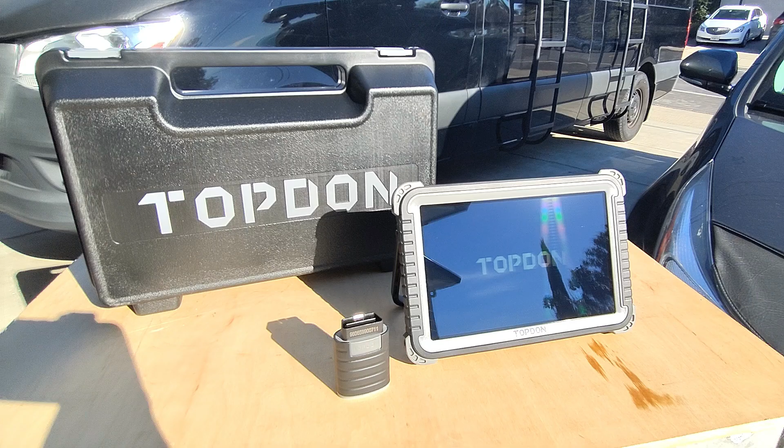Hello world, this is Random Fix, and right here I have the Topdon Phoenix Plus, and this is the most expensive scan tool I've actually purchased myself with my own money. And in this video today we're going to review it and check out some of the functions of the tool. I'm going to hook it up to a couple of different vehicles, try some stuff that I haven't been able to do on other scan tools, and see how it works out.

And then I'm going to show you guys what's in the box. And lastly, we're going to give this a Random Fix tool grade so you can make a better decision for yourself.

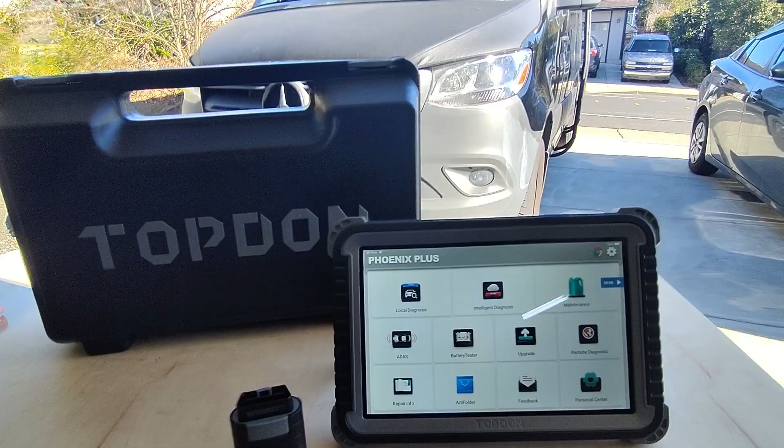So here's the unit, guys. It's powered up and I have it connected to Wi-Fi, and I've been using it for about 3 weeks. I wanted to do the video earlier, but I lost my voice, and with COVID times I really got to take it easy. So now we're doing this video today.

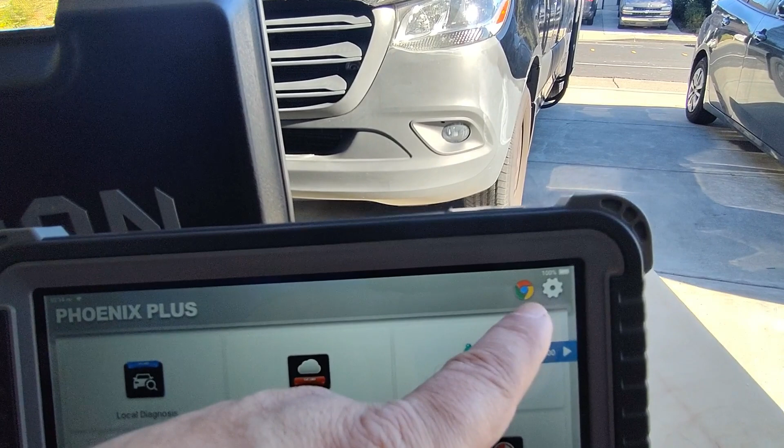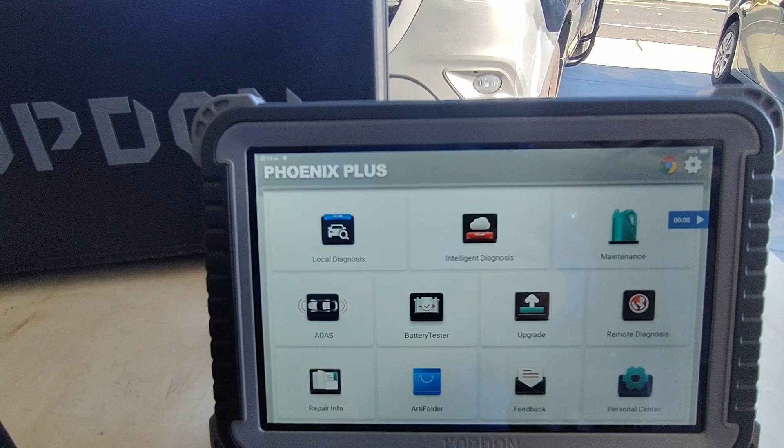I got a fully charged battery here at 100%. The battery in this unit is a 6,000 milliamp battery, and it lasts about 2 days of use. When you put it on standby for about a week, it only takes about 20%, which is pretty cool. It's got the Chrome browser built in when you do the update. And speaking of updates, this unit comes with 2 years of included updates. To activate, it comes with a special card and a password, and you have to set up an account. Once you do, you can get any update or firmware updates with just a click, just like I did.

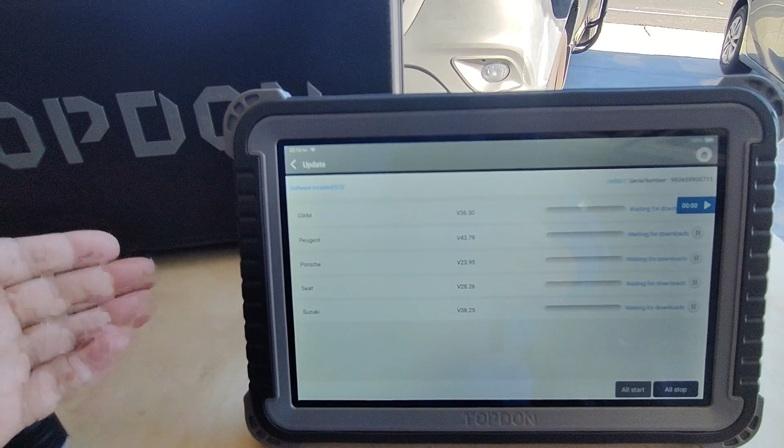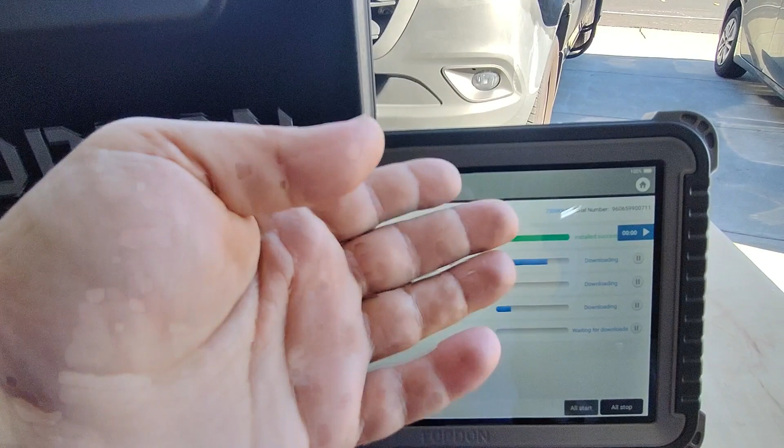And the unit is fast. Depending on whether you're using this for your house or a shop, I'll go into the pros and cons a little bit later on. As you guys can see, this is real time, and it just finished GWM. I think that stands for Great Wall Motors. We did Peugeot, Porsche's next, and it's going to finish all the updates. Anytime you want to go back, you just swipe like that and it'll go back. It's a very easy to use interface.

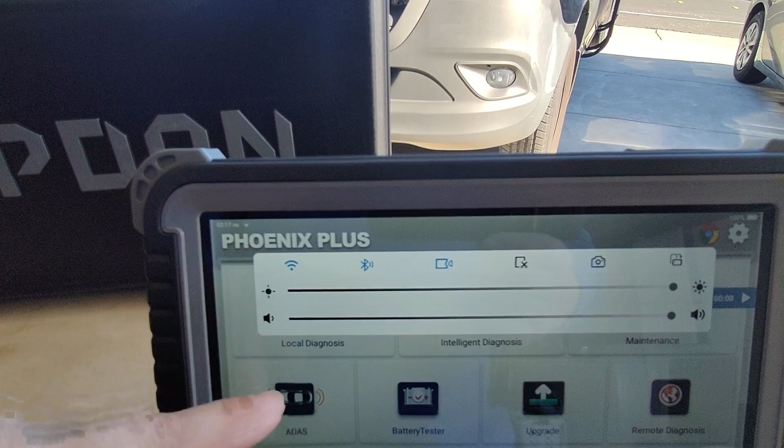It's basically a 10-inch tablet with great resolution. I think it's 1280 by 800, and it's running on Android 10, 4 gigs of RAM, 64 gigs of ROM. The interface, when you swipe down, will allow you to turn on the Wi-Fi and Bluetooth. And speaking of Bluetooth, this has a VCI, or Vehicle Communications Interface, and it's Bluetooth.

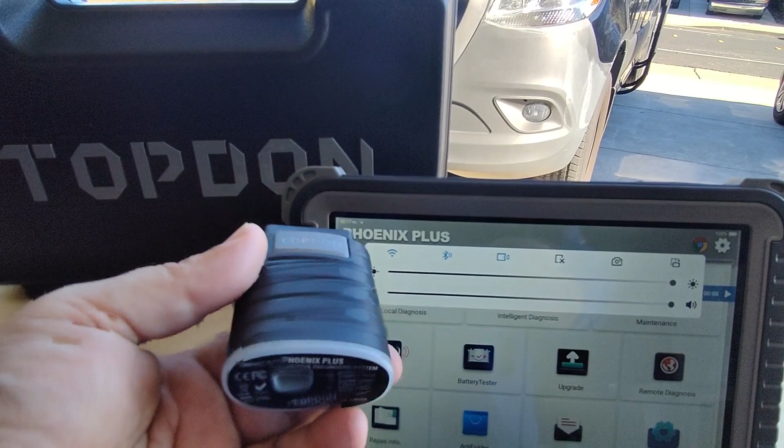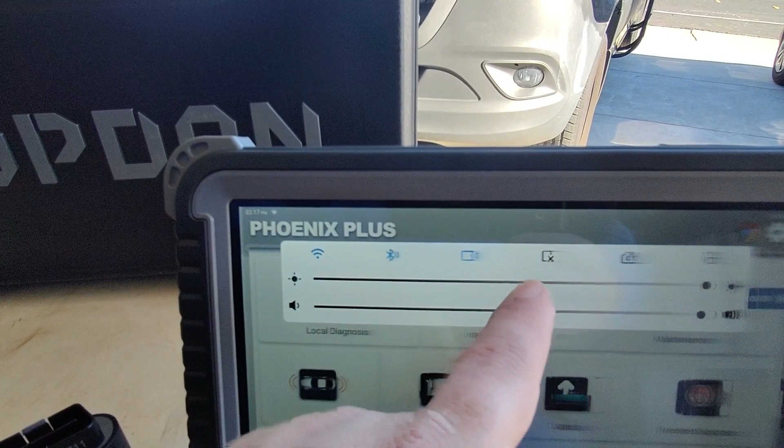So if you want to work in the shade instead of having to sit in the sun, you can do it. The unit does have TeamViewer as well, so if you want to work behind a computer with this connected in the vehicle, you can definitely do it that way. Bluetooth is right there. We can record, take a snippet, and take a picture. And talking about pictures, this unit has an 8 megapixel camera right here, and we'll display some pictures and some uses for that.

On the back of the unit, we can see that it's got this nice kickstand, and we're going to talk a little more about this kickstand because I wish it had a little notch like some of the Autel units, so I wouldn't have to worry about it falling off the steering wheel.

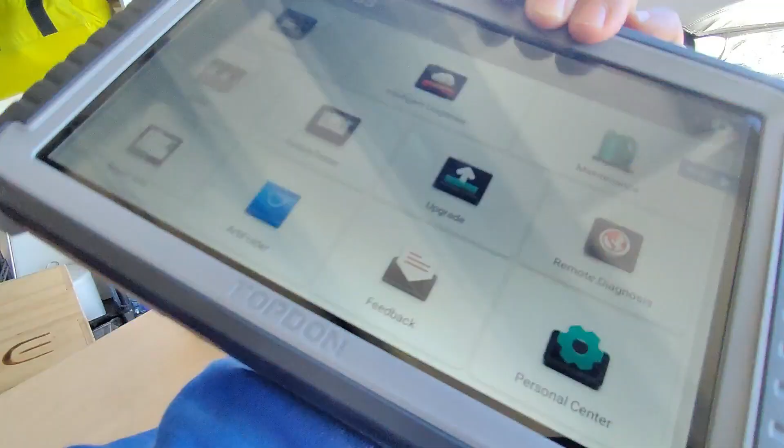We have a little expansion port back here, so you can buy different kinds of scopes and connect those once they're available. When I got the unit back in December, there weren't any scopes or modules available, so maybe they'll come in the future months. And again, this has a really nice feel, sturdy and pretty rugged.

And it also comes with a 1-year warranty. So if you guys are using this for a shop, some of the Pro units and some of the Phoenix Elite items actually come with a 2-year warranty. And if that's something that you're going to be using it for, make sure you guys check out my upcoming Phoenix Elite video as well before you make a decision here.

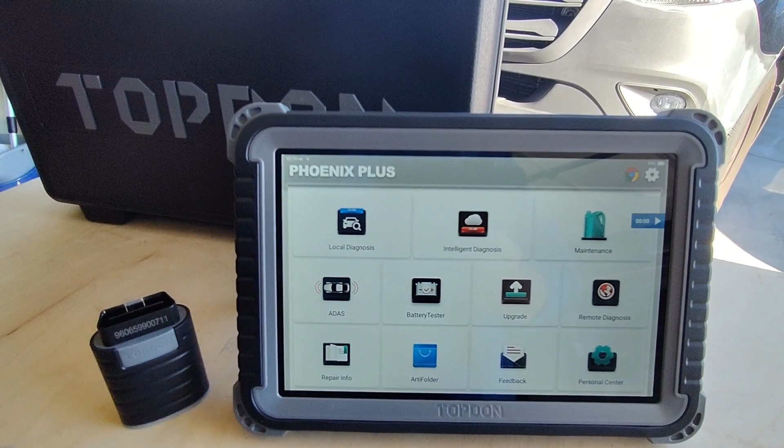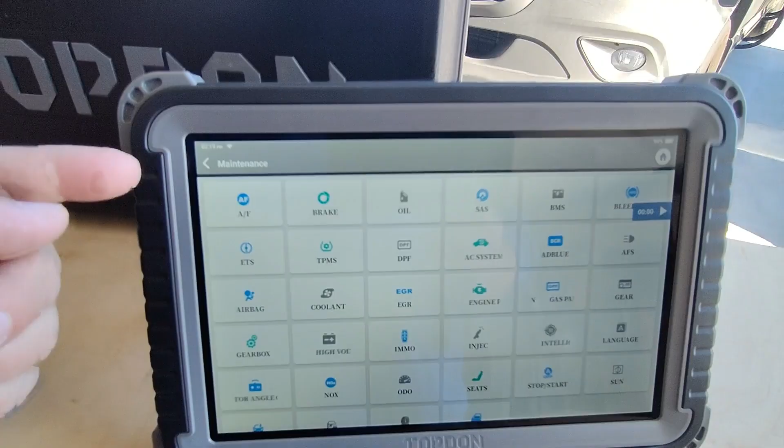So let's look at this interface here. So we got local diagnostics, we got intelligent diagnostics, and this is pretty cool because it gives you kind of a map of all the different systems, and you can visually see it, and we're going to take a look at that. We got maintenance, and under maintenance it's got 34 different maintenance resets. So if you wanted to go ahead and calibrate a window, you could.

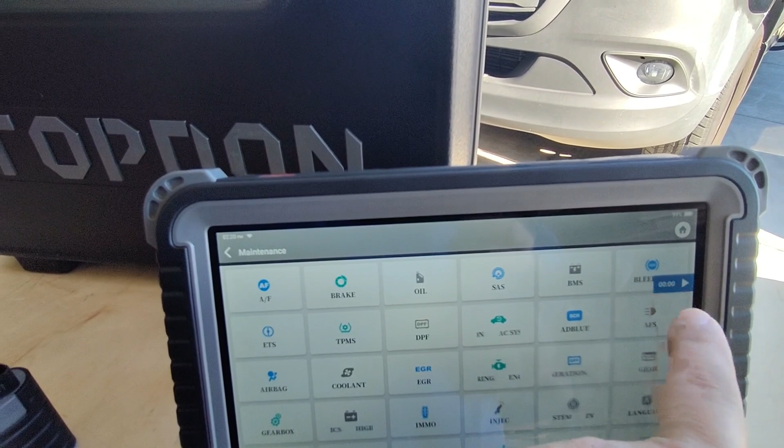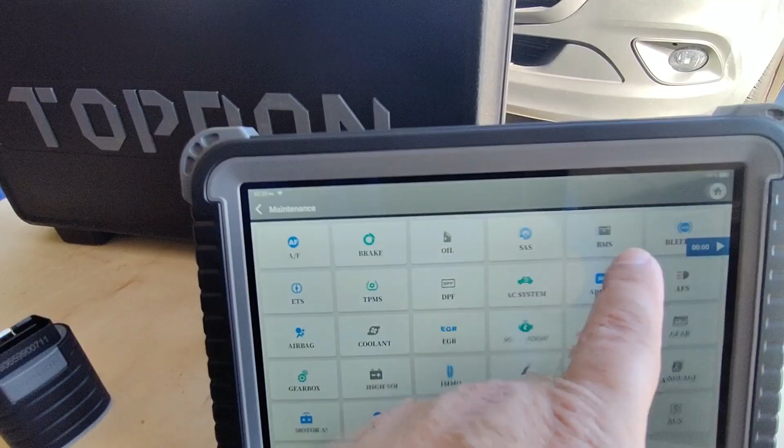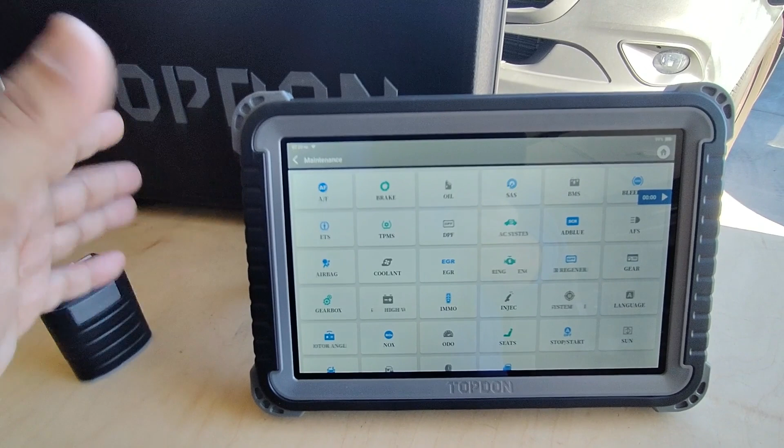You got the ABS bleeding, steering wheel angle sensor reset, gearbox, NOx reset, change language, TPMS reset, battery management, AdBlue reset. And my number one tip when it comes down to using a tool like this is email the vendor your VIN, make, and model, and they'll give you the different features that are available on your car, because not every one of these features is available for every vehicle.

So let's go back here, ADAS. And as far as the ADAS, I'm going to talk a little bit more about this towards the end of the video. This is able to do it. Just know you have to buy optional equipment, and I'm going to have a link down to the Topdon website if you guys want to learn a little bit more about that. And so we got a battery tester, and for the battery tester, you're going to have to buy this module that it shows right here, and that is not included.

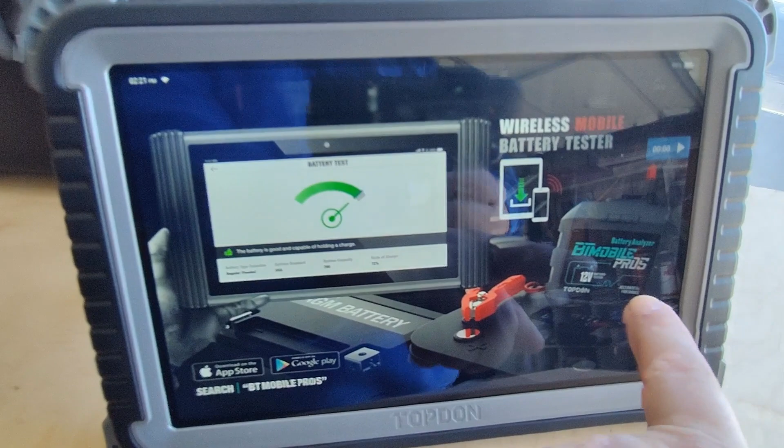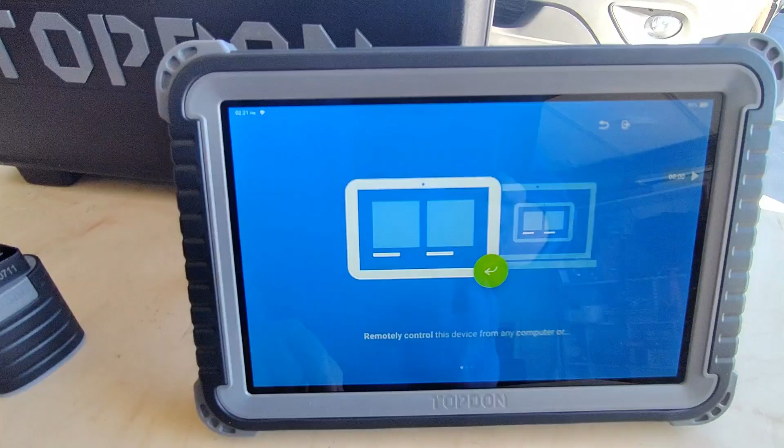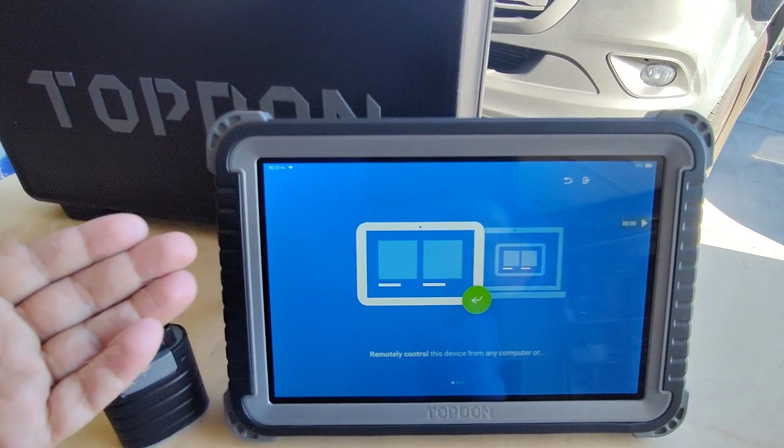We got the upgrade button right here, so you could go ahead and do all your upgrades. Remote diagnostics, and this is that TeamViewer setup that I told you about earlier. So if you want to go ahead and connect this to your vehicle using the VCI, and leave this in your garage, and then maybe you have a laptop or something you want to control this with, you can go ahead and do it that way.

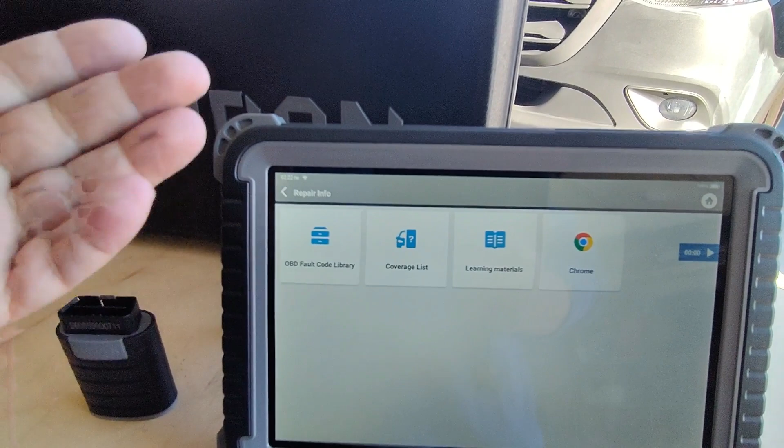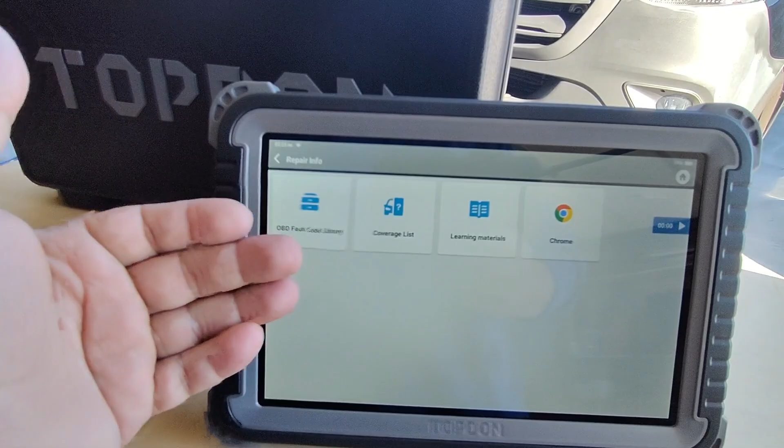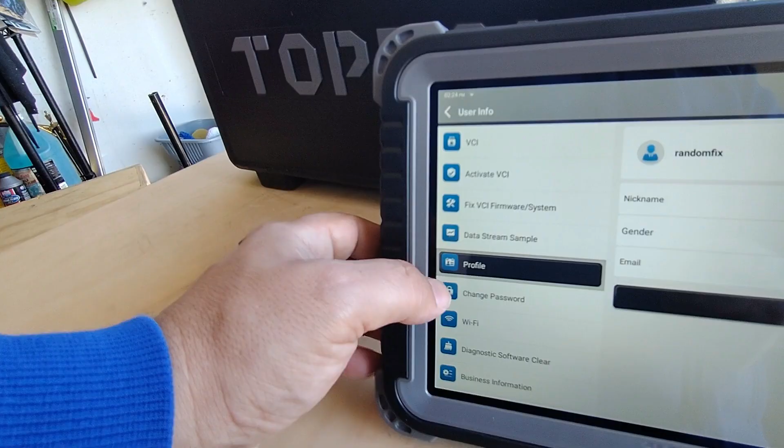We also have a feedback section here, so in case you want to submit a ticket and there's a bug with this unit, you can do that. And we got a personal center here. You can change a password, connect to another Wi-Fi network, and you could also put the business information in. So let's just say you're using this for a shop and you're going to share some of these reports. You can just upload your logo, put the shop name, address and phone number in, and you're good to go.

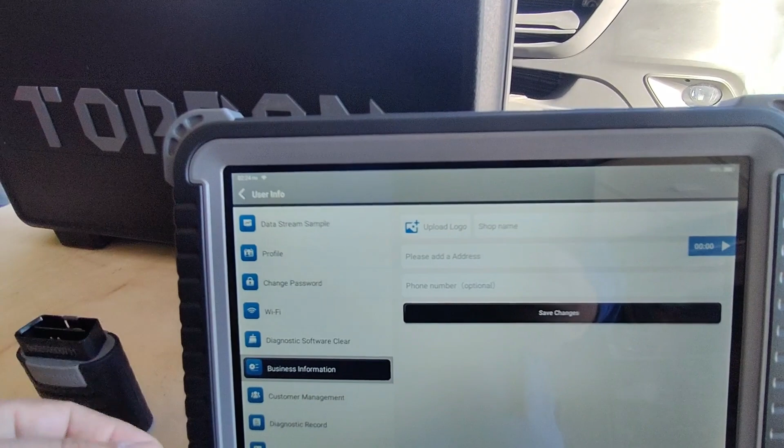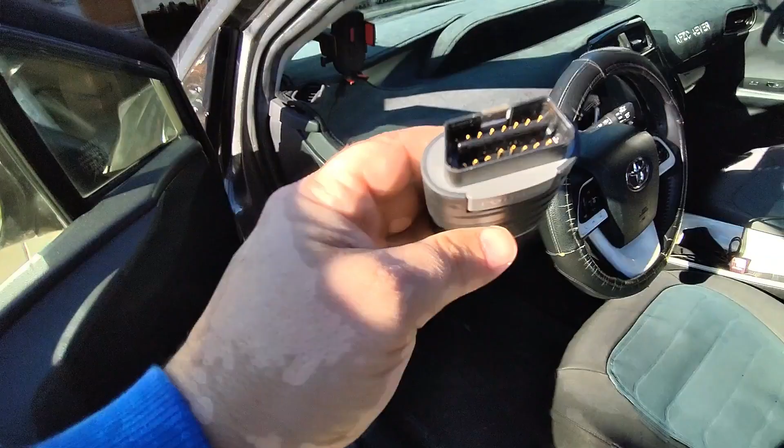We even got a customer management tool here, diagnostics, photo album, screen recorder, and settings. And if you guys notice right here, we have this little play button. So if you guys hit that play button, we can record the screen, and this is going to make it really easy to show you guys what I'm doing here when I pop this in the vehicle.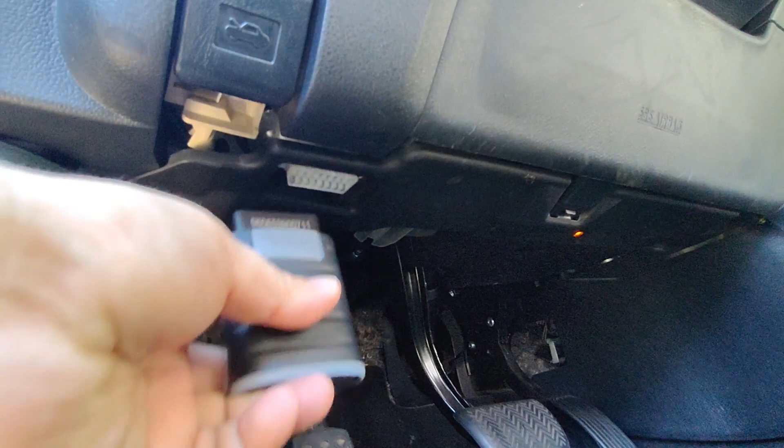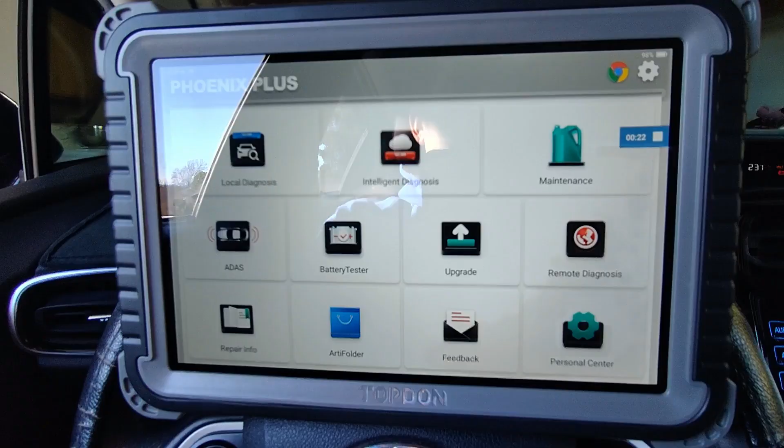So to pop this in the vehicle, all you want to do is grab the VCI, find your OBD2 port, and on this Prius it's right here, and you want to just slide it into place. And the VCI port here is keyed, so if you look at the shape of it, you can't get this wrong. And when you slide it into place, you'll hear that beep. So we got the VCI connected, ignition's on. So this is what I was talking about on the back. It doesn't have a notch, so sometimes this will slip when I'm using it.

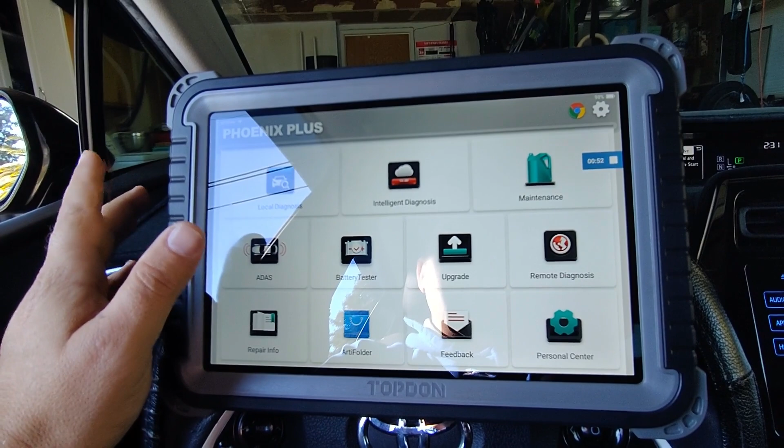Nonetheless, let's go ahead and take a look at this. So we're going to just look at local diagnostics here. Now we're going to go ahead and select camera scan.

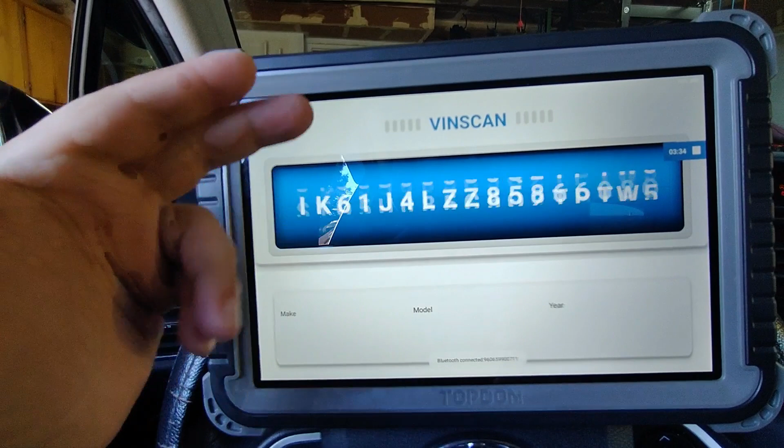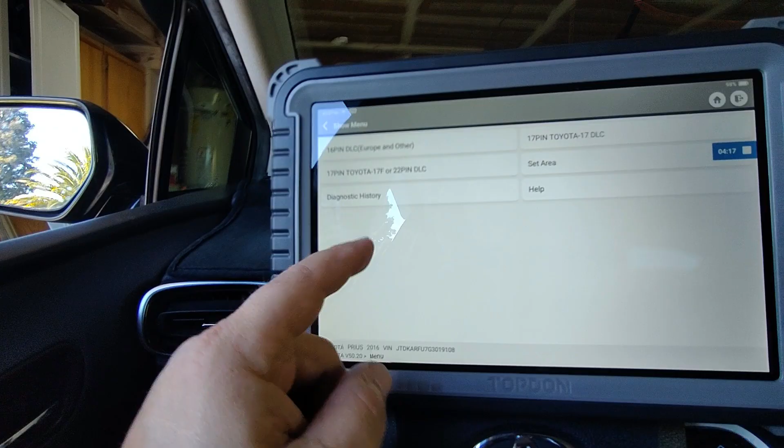And yeah, the VIN scan did not work. We'll try it on another car. So you could go ahead and enter the VIN here and type it out. We could also use the intelligent diagnostics, and this should auto-populate the VIN as long as our ignition is on. And yes, the VIN scan worked. So we're going to go ahead and go to local diagnostics, and you want to go ahead and set the area here. We're going to choose North America.

So let's just go to local diagnostics. When we click on this, what we can do is go ahead and do a VIN scan using the camera, which does not work on this Toyota. Or you could do a recent search. I'm going to choose a Toyota here, choose a 16 pin connector. And now we're going to go ahead and choose any additional features it has. Hit OK.

And you guys can see that the tool is lightning quick compared to some of the budget devices out there. We get the system topology look here, and we can do a system smart scan, and it'll go through all the different modules, and it'll pinpoint any modules that have issues. So I'm going to let this run here for a second, and you guys will see that right now it's checking all the different modules here.

And this is the main thing between the local diagnosis and the intelligent diagnosis. On the intelligent diagnosis, it normally just runs this automatically. In this case, this is a little different because we're choosing to run it. And I know I have an issue on the PDM on this vehicle. Let's see if this can detect that. The PDM is basically the module that controls that passenger side door here.

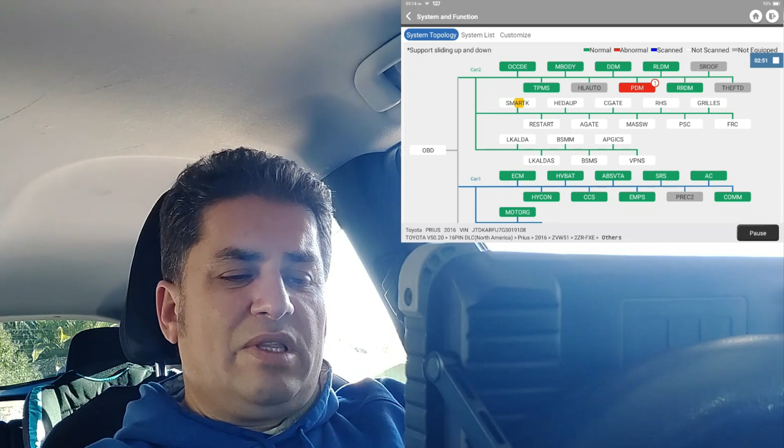And there we go. We can see that it did find the PDM fault, and it has a 1 next to it letting us know that it detected one issue. It'll go through the rest of these, or you can go ahead and hit pause. And again, this is a great view if you want to look at it this way. I personally like the systems list better just because I can read and see which module is for what, and it's a lot easier to understand.

So let's go to the HV battery here. I'm going to hit OK, and we're going to choose actuation tests. These are special tests you can do where you're basically going to send a signal to the vehicle. So in this example right here, I'm going to send a signal to the fan for the hybrid system here to initiate. I can monitor the data, or I don't have to monitor the data. I'm not going to monitor this data just because I can hear it.

You can just use the arrows left and right, and we can hear that that fan is on now. And I can decrease this. I can do the same thing for the blower motors, the fan speed, windows, electronic water pumps, automatic front grilles. Any kind of actuation can normally be done through this menu here. So this is a bidirectional scan tool, and that's where that bidirectional function comes in, the fact that it can actually send commands to the vehicle.

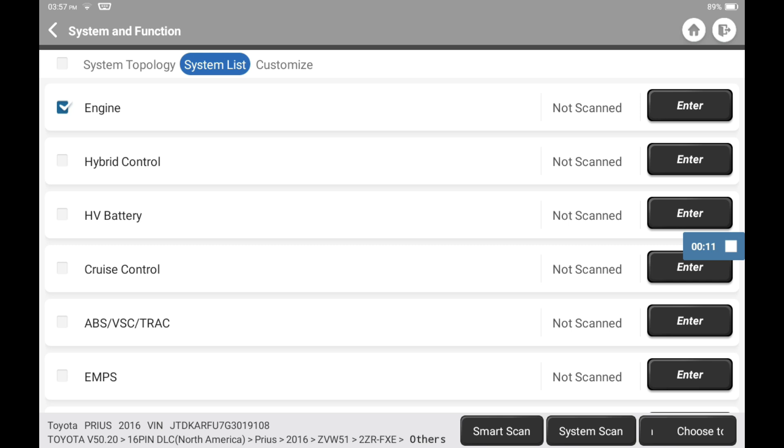Hey everybody, I wanted to show you really quick what you get with this 10-inch display, and when it comes down to graphing, you're really going to love what it does for you. So I'm going to enter the module for the engine here, and we're going to go and do some live data charting. If you go under read data streams here, we can go ahead and select some data streams, and check that out. We can select 207 different data streams here, and this is basically a lot of information.

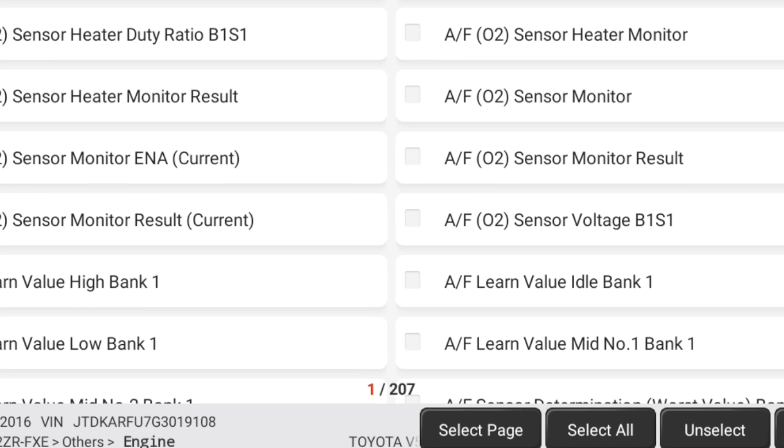So I'm going to choose some information here that I want to look at really quick, and I've selected a few different data streams here, 6 total. I'm going to go ahead and hit OK, and now it'll basically display everything out to me. You can see that my battery voltage is under 12 volts. So I'm going to go ahead and start the vehicle. And as a tip, guys, just make sure your battery voltage is over 12 volts if you're going to program anything. So I'm back at a good steady voltage here of 14 volts.

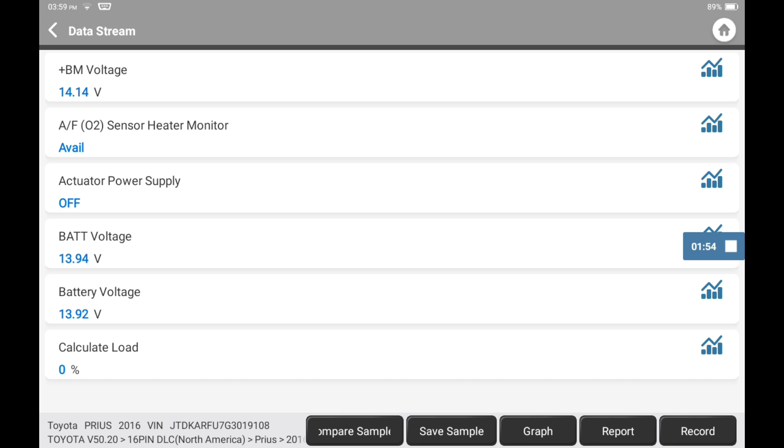And we can see that everything's looking good. And I can graph this. I could save a sample here. I could do a report, and I could hit record as well. So I'm going to go ahead and hit graph, and we can see everything is graphed out here beautifully. So if I was looking at oxygen sensors, it would make it really easy for me to detect if there's an issue with one of the oxygen sensors, if one of them was being lazy.

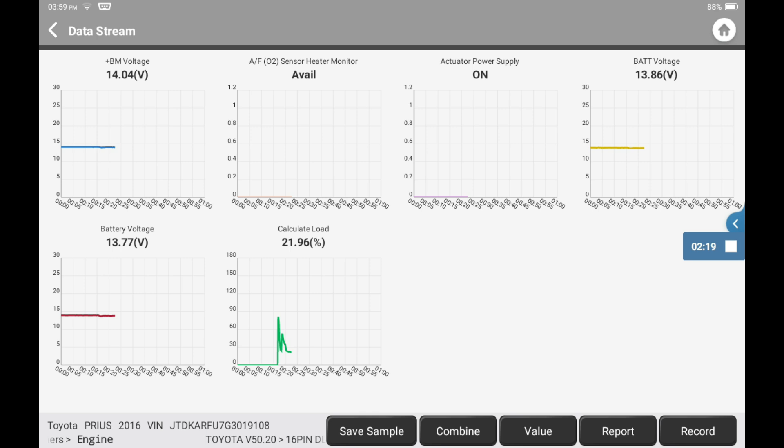And I'm going to go ahead and start the engine here, and now we can go ahead and just see what's happening. So if this was not a hybrid vehicle and I was having an issue with maybe possibly an alternator, and I had a nice big display like this, I can go ahead and basically have 6 graphs side by side, and being able to record this and play it back over and over to go ahead and troubleshoot my issue is really going to be a big plus.

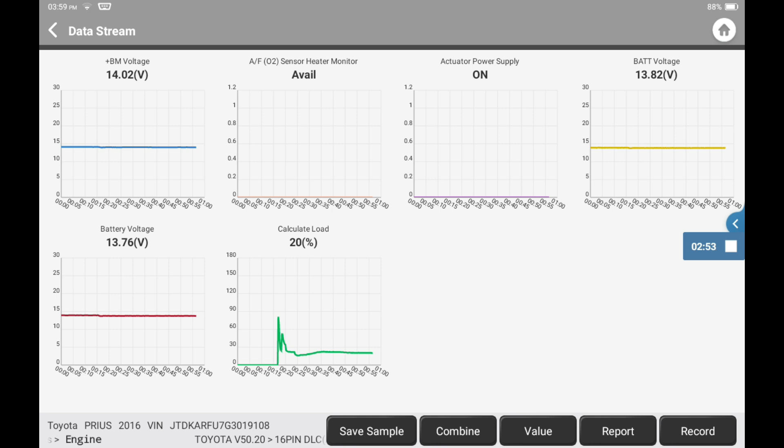And now I've selected a total of 4 different components to monitor. And check that out, guys. You can definitely see how useful that graph is when it's a little bit bigger.

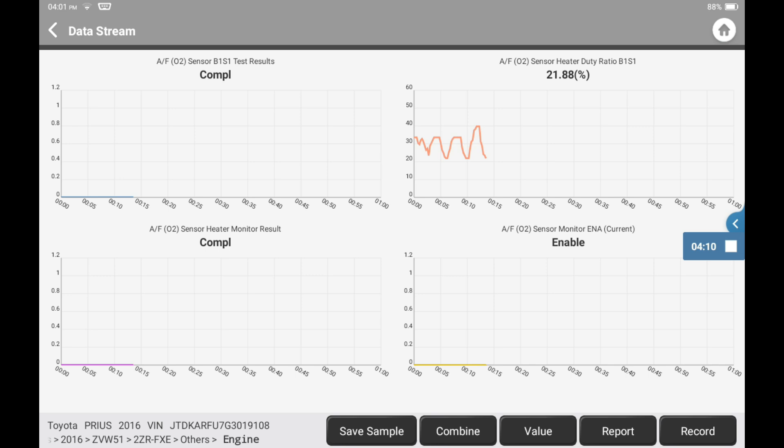So this is pretty cool. So let me go ahead and pop this in the Mercedes. So we're here at the main menu here. Let's hit the intelligent diagnosis. So everything worked correctly. Local diagnosis.

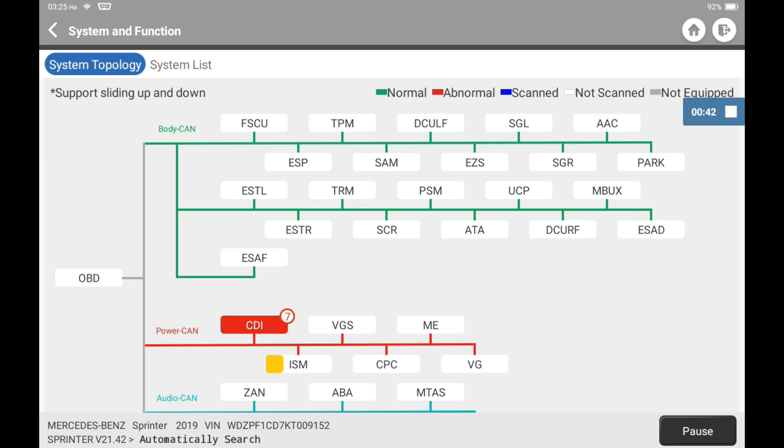And let's go ahead and do an automatic search. And we're going to do this system scan here. And one thing, when you have a European vehicle, just be ready for a lot of error codes, as this is pretty normal. So even though the vehicle is under warranty, I'm expecting a laundry list of issues.

Scan is done, and you can see that the system scan is complete because everything is either green, red, or gray. And gray basically means it's not equipped. I can do a report. I could do a diagnostic plan, and I can also clear everything. So let's send over a clear message to this. I normally recommend having the report first before you do this. I'm just showing this to you guys on the video here, and we'll see how well it does.

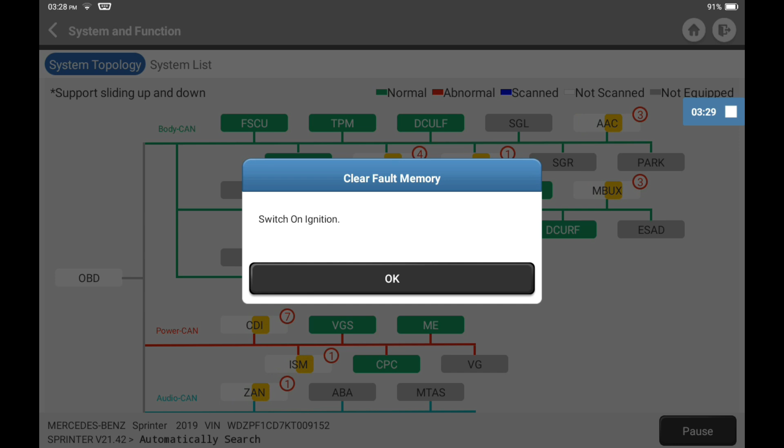So this is a good sign. It's asking me to turn off the ignition, and ignition's off. And after it waits 10 seconds, it's asking me to turn on the ignition. And once that's done, the ignition is back on. I'm going to hit OK.

And again, it worked. And you can see under the SAM right here, SAM, that it went from 4 to 1. And now I can go ahead and do another report. So I always recommend doing the report before and after and comparing the two. And now if I wanted to, I can go ahead and troubleshoot what's going on with the vehicle.

And remember one thing with vehicles in winter: whenever the winter months come, unless your battery is in perfect condition, a lower battery will cause all sorts of issues. So always make sure you guys have a good battery. And now let me show you guys what's included in the actual box here. And I just want to show you how this actually picks up all this information.

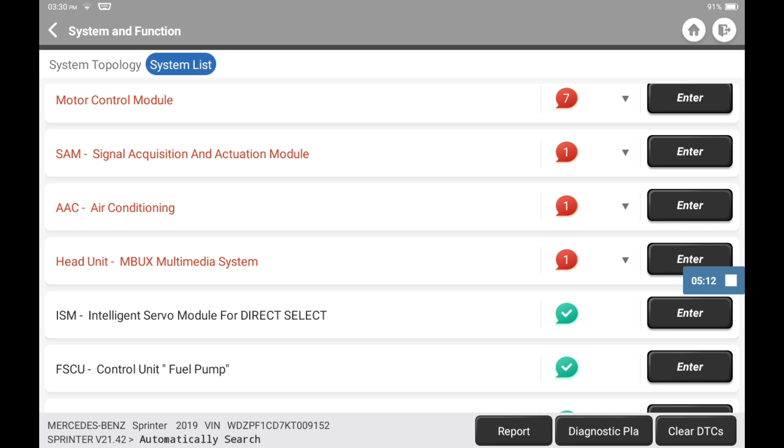So if we look here under the motor control module, it has 7 errors. And let's go and see what these errors are, because on certain vehicles, they're kind of tacky almost. So it'll have all sorts of errors for really minute things. And we can see that the errors here are pretty minor. And we have 2 for the DEF fluid, for the diesel exhaust fluid, 1 for the fuel level is too low. So having a scan tool like this really does make it very easy to troubleshoot your own vehicle.

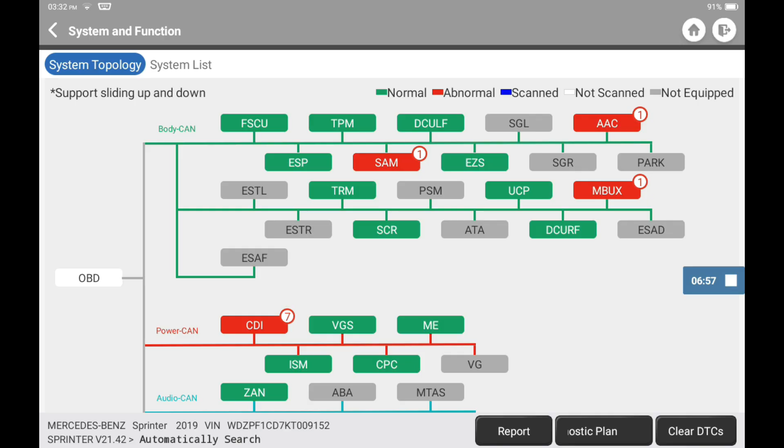So now that we know what the unit can do and some of the cool features, let's actually take a look at what's included with the unit here in this nice hard shell box. So the unit is going to come in this beautiful box here, and there's going to be a lot of accessories, and it has these drawers right here which you can go ahead and unlock, and everything fits into place here in its own compartment.

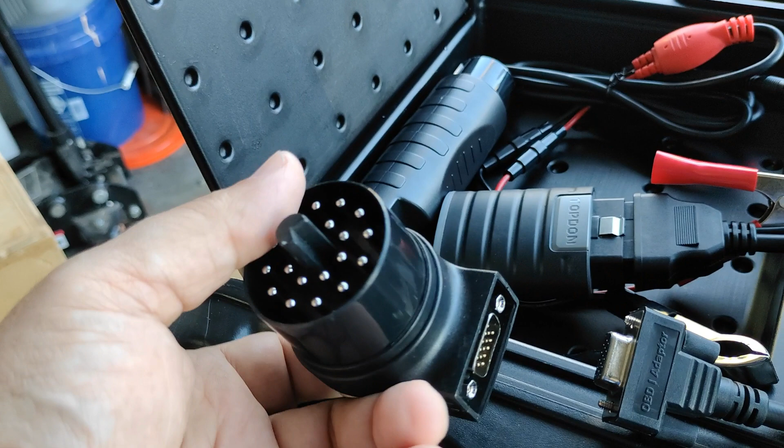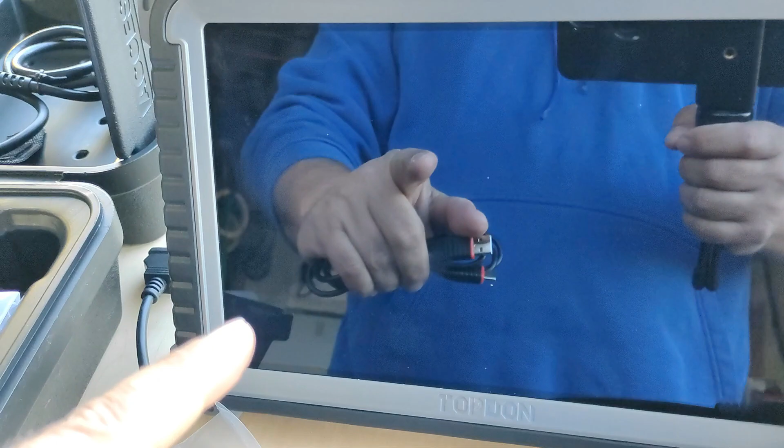So the unit comes with these BMW and Mercedes legacy ports like this, and the basic idea is the VCI just basically plugs into one end and the other end just connects to this side. It comes with an extension here for your OBD2, comes with some cable in here, USB-C, and this is how you actually charge this unit, is using the USB-C. And it does not come with a power brick like that. I just use my Android charger to go ahead and charge up the unit.

So you get lots of special adapters and a very basic owner's manual, and the unit itself is very easy to use. They are going to go ahead and make future updates on this. So if that's a concern, do not be worried about that. I honestly do not know how much the renewal cost of the software is after the 2 years is up. But from my own experience, you can still use the unit after 2 years and you'll be okay. You will not be locked out. However, you will just not get the newest updates. So if that's something that you thought about, just know that you should be good.

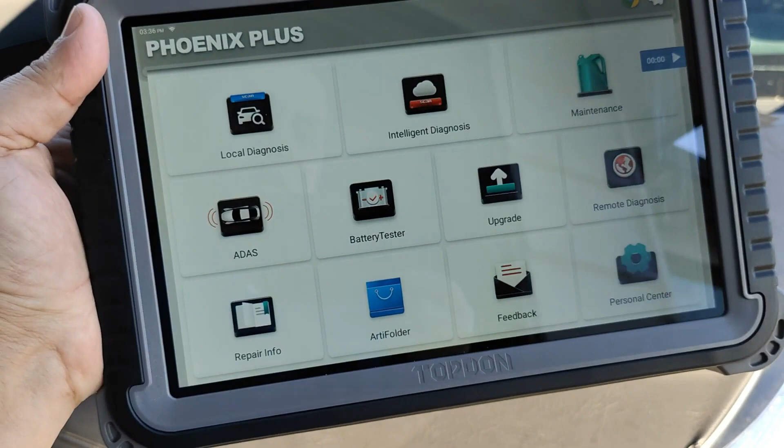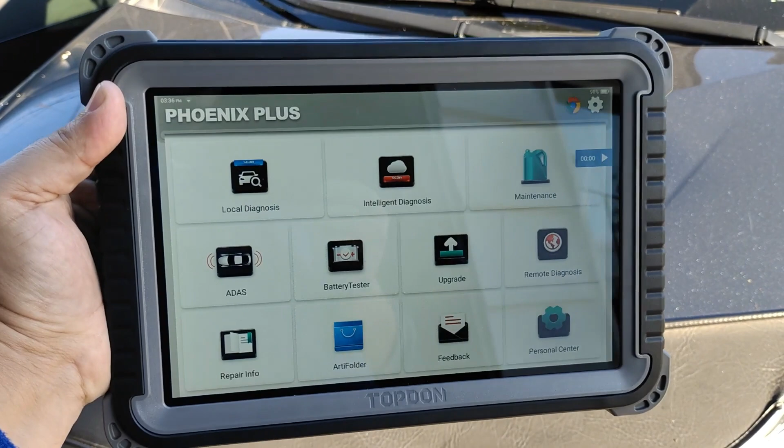So one thing I wanted to note is, depending on the level of maintenance you do on your vehicle, you don't necessarily need to spend $1,200 to do basic maintenance on a vehicle. If you have the budget and you want a tool that could do a little bit more, these scan tools like this are really a great buy. And in this video today, I can't really dive into every aspect of this scan tool, but just know if you're trying to reset a check engine light, this would do it.

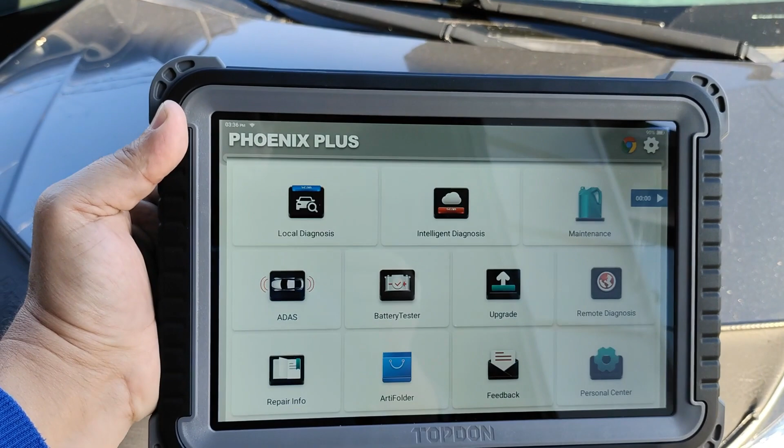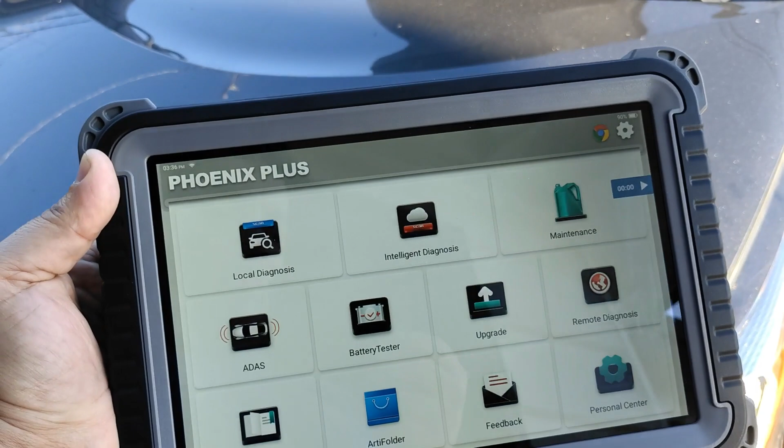However, a $30 tool will also do it. Will it give you the same information as this? No. However, if you're looking for the OE side or the Toyota or Mercedes side of the repair and you want to know what that code is, you could probably get away with a $300 tool. And something like this just makes that process a lot more visual. If you want to start graphing things and looking at live data, you can look at the live data here, and it will make it a little bit easier for you to possibly troubleshoot using one of these.

This is my favorite part of the video. This is where we're going to give the Topdon Phoenix the score here so you guys can make that better decision for yourself. I showed you guys all the different accessories that it comes with. It even came with a car lighter charger, if I didn't state that earlier, so you could charge it in the car if you're using it a lot. The battery life on this is amazing, and I paid for this unit out of my own pocket. And I'm going to give this a fixed score of 88 out of 100.

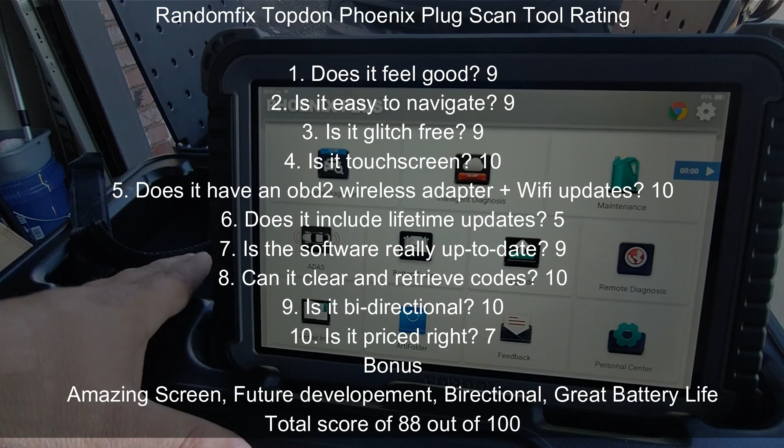And I really like this unit if money was not a thing. However, it is, and based on the pricing factor, it was not able to get into the 90s. If you're going to be using this for a shop, this is definitely a unit that I would recommend. For the average user that's going to be using it around the house, I really think there's going to be other units that are comparable in what they offer. They might not have the ADAS adaptation. However, remember, you have to buy special equipment to make this work, and they're different for each make. So I would have to buy one for Mercedes and then for Toyota.

Anyway, it's a very complicated procedure, and even though it'll walk you through it, I think 88 out of 100 is definitely a fair score on this.